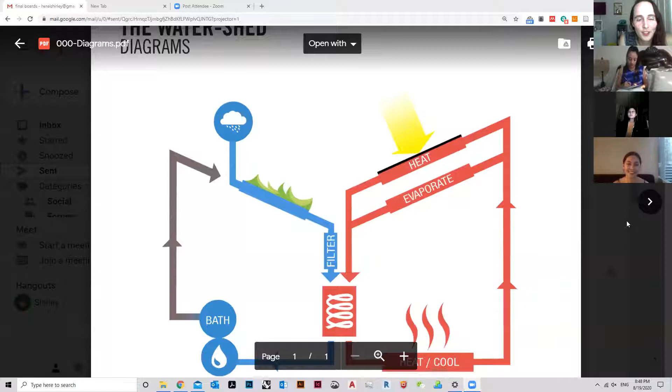That was great. So we're going to show you, Shirley, can you share your screen? We're going to show you what this sustainable architecture looks like in a research studio that we did during our masters.

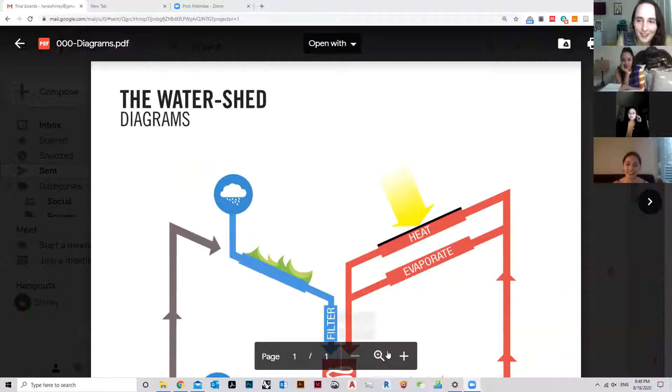I think our studio was a little special because we were also looking at water, and that's a very important component of sustainability that people usually ignore. Like I said, most people in the sustainable architecture industry think about carbon, but actually water is getting so scarce and we need to think about that. So you guys can start and tell me where to look.

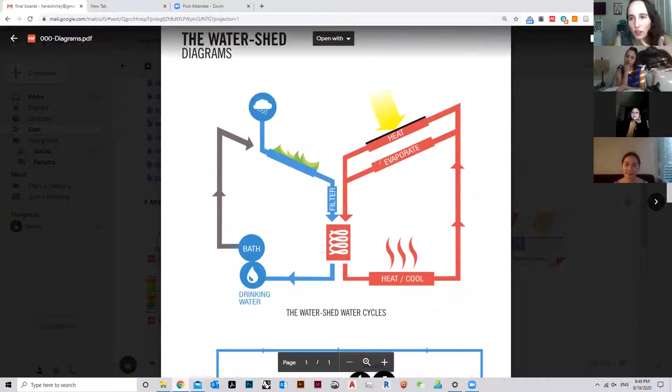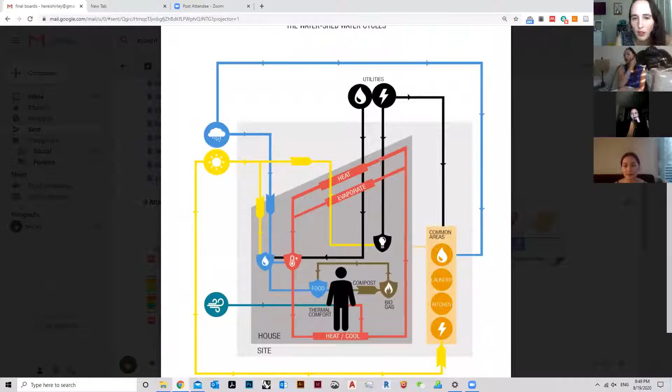Briefly, our project was to analyze a mobile home in two different climates and extreme weather. One was Buffalo, New York, and the other was Houston, because hot and humid and cold and humid are among the most difficult climates to design for. We had to select either one and do some analysis.

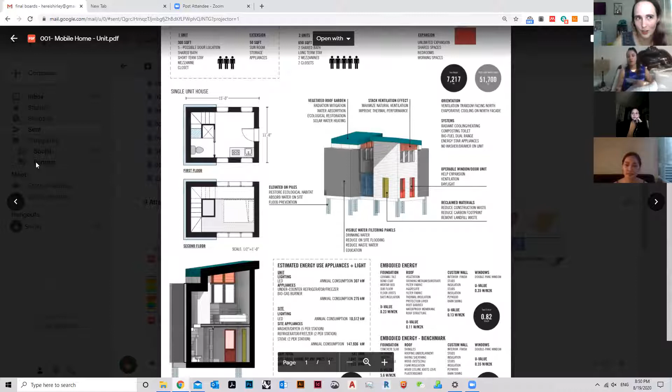We decided to do a house we called the watershed, because we wanted to think about real watersheds and what they do when they absorb water, filter the water, as a natural system. We wanted our house to display that portion of education - watersheds are a thing that are in danger right now in a lot of different places. Since it's Houston, it's also near the coast, so we had to do a diagram of the systems we were incorporating into this little house.

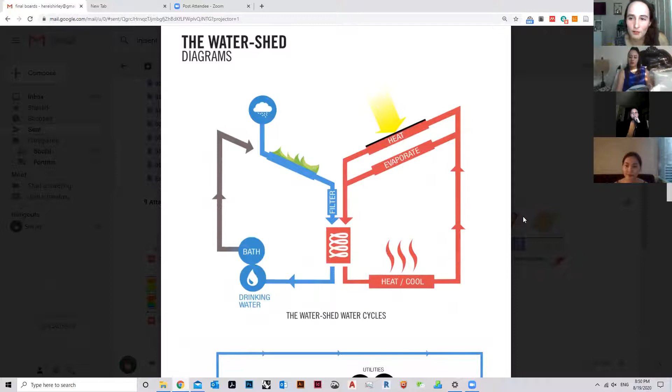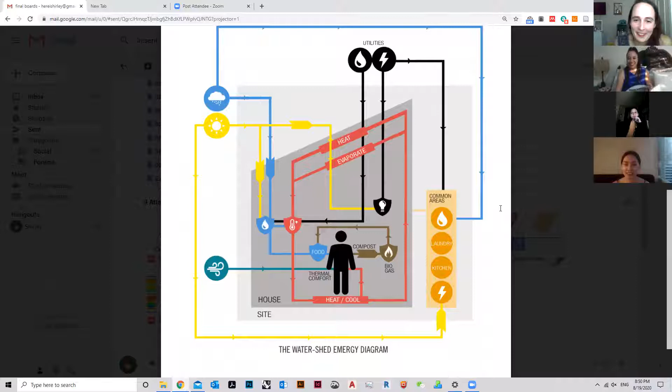So Mika, this is an emergy diagram - I don't know how to describe emergy diagrams, but I'll add that the reason we wanted to look at water is because there's a lot of drought happening now, and we feel water is such an important resource. If we could take architecture as a means to preserve that resource, or make it more available for people, that would be amazing.

This is just a basic emergy diagram that we created for the entire house. By emergy diagram, we mean it takes into consideration all the systems that would be placed into the house and all the resources you would need. The reason we create these diagrams is, as much as possible, we want it to be a cyclical diagram where you don't have as much wastage or as many resources getting wasted.

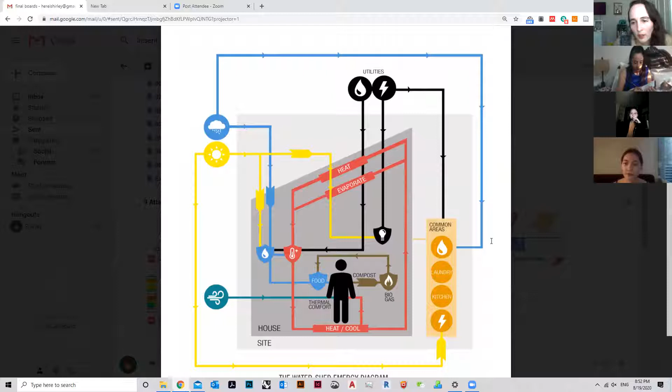Yeah, because right now we're relying so much on grid provided by municipalities. So if one day those things are not stable anymore, you would like to have some individual control over the necessary resources in your life, for example, electricity and water.

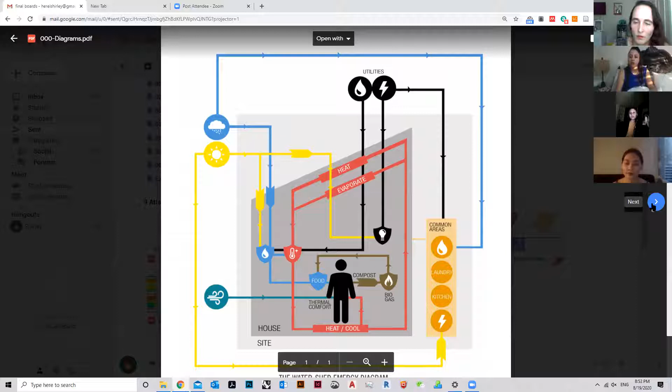So we had to look at transportation and the unit configuration, because one unit accommodates about 1 to 3 people. It's a tiny house. So we needed to provide for bigger families, because not all families can be accommodated with just one unit. So you want to make sure that this can grow depending on your family size.

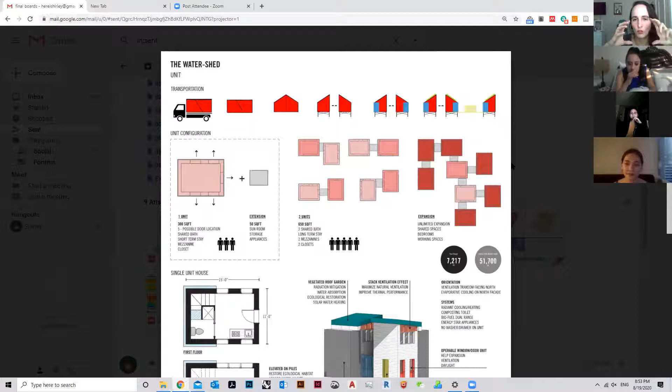So we designed this module and this component to the module where you can connect other houses if you needed more rooms. So what you see here is the one unit, 3-person connection, and then how it can grow depending on your family size.

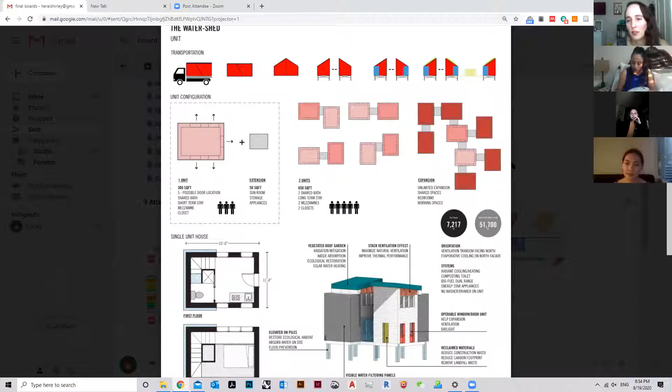On this, we had to do the... so this is just a diagram showing all the systems, like our wish list, what we wanted to put in there. It was all the environmental techniques that we wanted to incorporate. So some of them are like a vegetated roof, stack ventilation effects, looking at orientations in the systems, operable windows, reclaimed materials, and elevated on piles.

At a very early stage, we analyzed what the energy consumption of the house would be like with its appliances and its embodied energy, which comes from the materials. But this was just preliminary; we later tested it and did the full analysis. So you can go to the next slide.

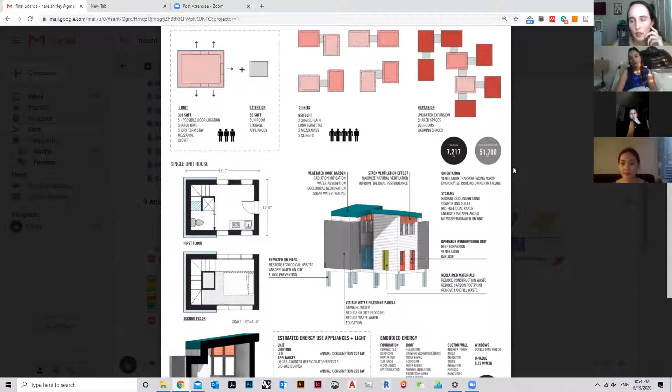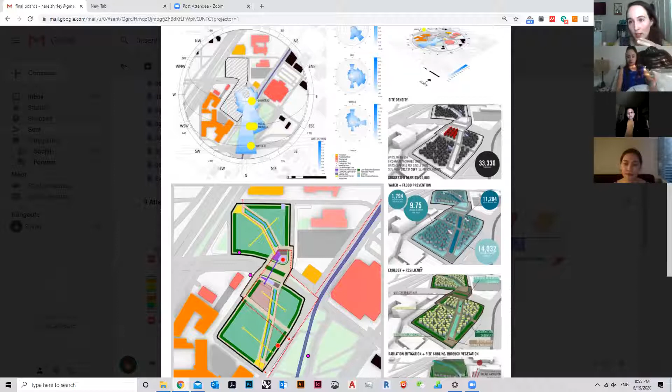So this is the site. We had to pick a site near the downtown area. We did studies of the wind and the sun angle, and the site density—how many houses fit into the site—because the more density you can have in a place, the more efficient it is in the end. You're using less land per module, which is a better scenario than just having a small building on a big lot. You're eating less of the land.

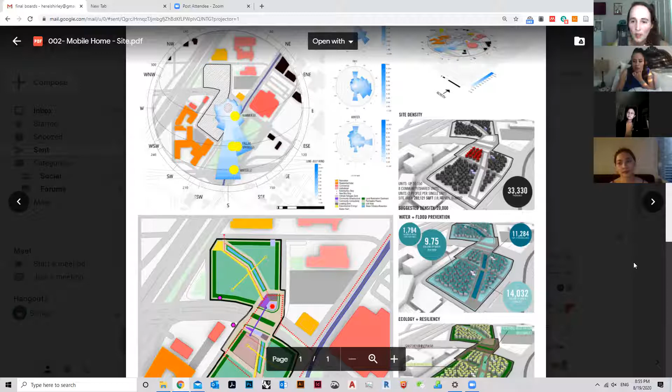We did water and flood prevention techniques. We did ecology and resiliency, because this is an empty lot—there's nothing in there. So we were strategizing how we were going to get vegetation and species in it and become more like an ecosystem, not just a house with its own systems, but at a site level, at a bigger scale—how are these houses working together?

Then we created a diagram showing how we were going to deal with radiation and have a site cooling effect, so that the site cools down before we have to cool down the houses. So it was thinking about this whole concept of the house and its systems at a bigger scale, and the use of vegetation to cool the site and provide enough shade for the houses to be below the tree canopy, because it creates a cooling effect. So if you cool down the site, the less energy you need to cool down the house.

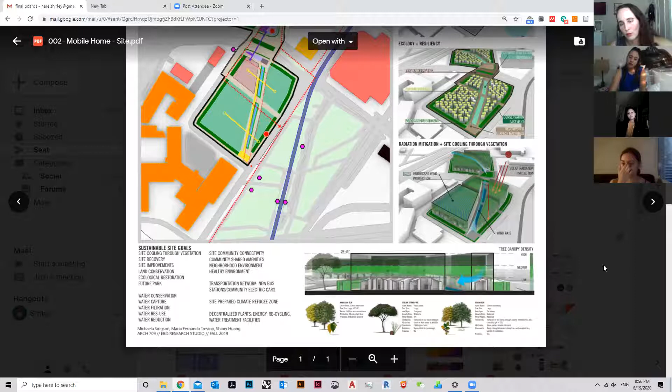So you can go to the next. It's a lot of information. Yeah, we did so much stuff.

So look at the watershed sections, and you can see different components we mentioned previously about filtering water from a vegetated roof, and also different layers of sand, stone, sand, charcoal, and UV to get rid of bacteria and bring it down to a level that humans can use.

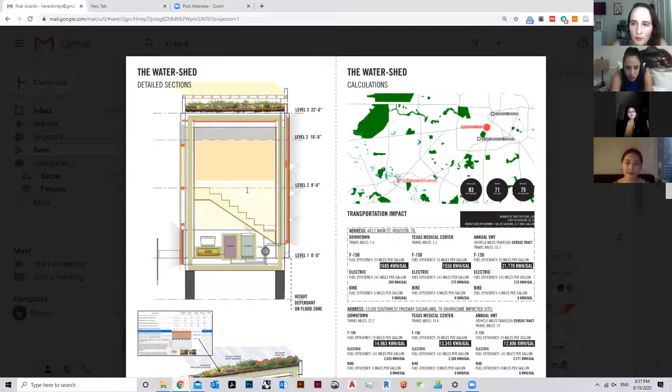In the house, we prepare tanks for people to store the water, and also a panel for evaporative cooling to control the temperature of the water. I think we also have a composting toilet that can, to some degree, regulate the interior temperature in the winter. We did some study on the local plants and on the assembly of the roof itself, looking at the thermal property and moisture property of them.

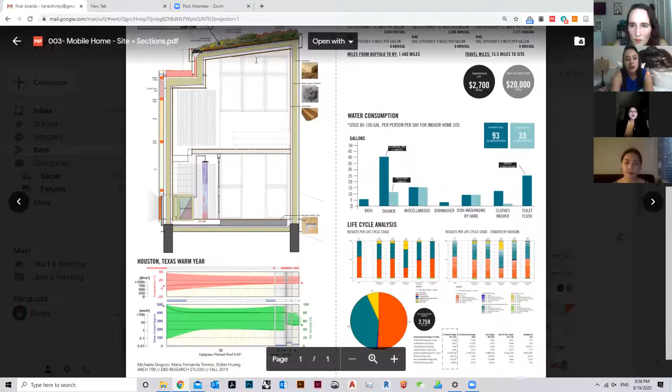Basically looking at the different components of the building and making sure that they work together. So we take a closer look at the transportation and water consumption. Maria, do you want to talk about those?

Yeah, so what we did on the transportation impact diagram and analysis is look at transporting the unit from one place to another in case of a hurricane, how much efficiency and energy will it take up. So that's pretty much those two analyses.

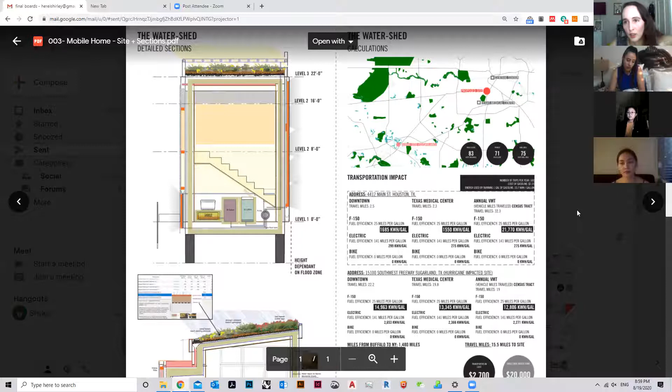And then on the water consumption, we calculated the average water consumption in a regular house, which is 93 gallons per day per person. We brought that down to 33 because we removed the water toilet, used energy efficient faucets, and some other measures. And we incorporated the user, so if it's a more conscious user, then the water goes down even more.

And then we did a life cycle analysis, which measures the carbon emissions from the materials.

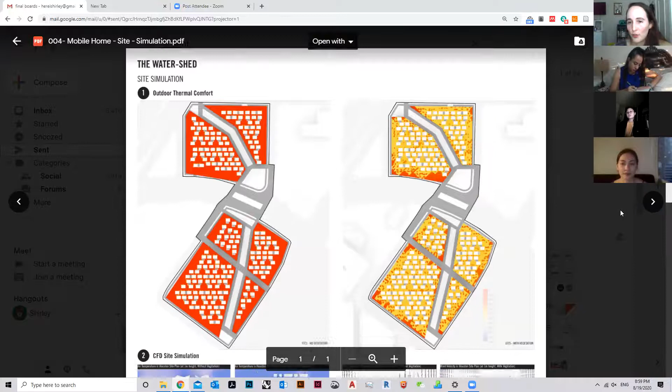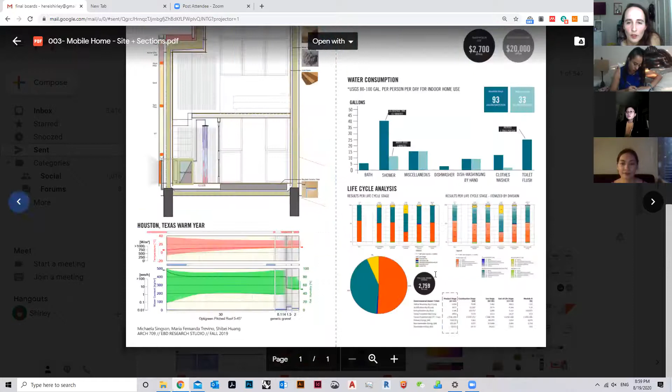After all that analysis, it's a diagram showing different scenarios - if you use this material, your carbon emissions for your house are going to be this high. Because we used a lot of reclaimed materials, and instead of concrete we used wood, the carbon emissions for the house are way lower. So it's that kind of decision making that makes your building much more energy efficient.

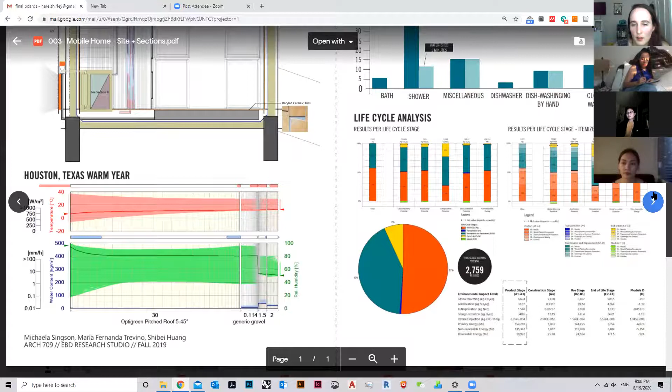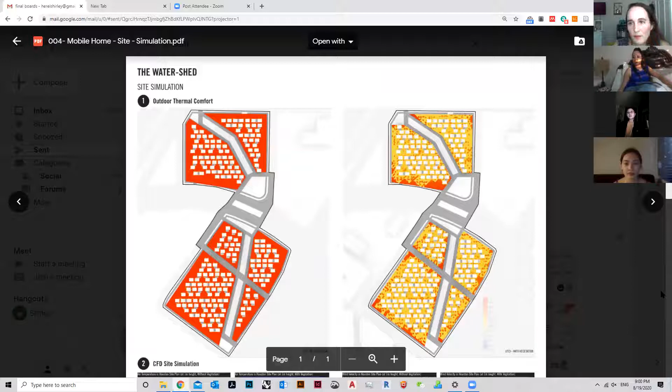You can go to the next slide. So the first one shows the difference between a plan without vegetation and a plan with vegetation. You can see the ground temperature got so much cooler just with the trees on site. So I think you need a lot of trees.

Yep, and a lot of leaves. Trees with no leaves - we got that critique at finals. I don't really get why leaves are bad, but people apparently don't like leaves decomposing on sites.

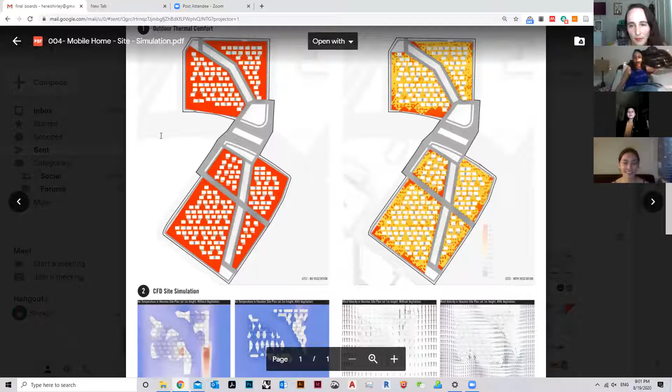That also explains why a lot of cities without trees have a heat island effect, where the cities get so much hotter than the suburbs with all the concrete and streets without natural vegetation. That's also another aspect of sustainability.

We look at CFDs, computational fluid dynamics, to understand winds. This is basically what we're trying to understand - how wind will travel on our site, so we can orientate our buildings towards it and maximize natural ventilation.

Oh, a lot of rainbow chart. Mika, do you want to talk about this?

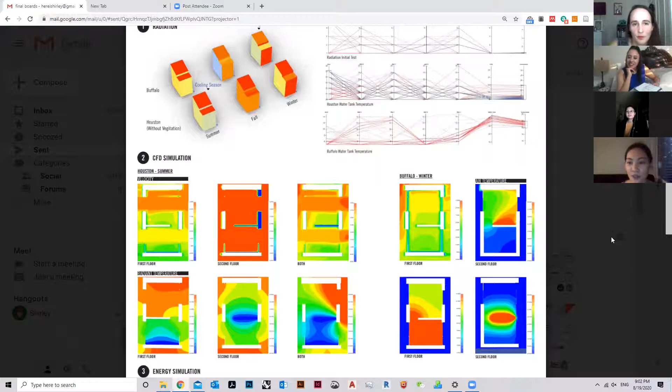Yeah, so what we also looked at were CFDs within the building, within the house, because we wanted to see how the wind would be moving throughout the house. We tried to create a stack effect so that the hotter air would move with the wind to the top of the house.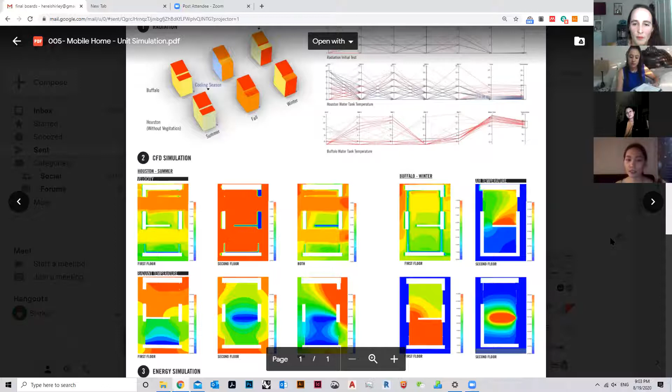So these are CFD analyses we did to try to see if what we wanted to happen was really happening within the house. We also tried to heat the lowest floor of the house to create that wind movement upwards, because hot wind technically rises. So what we tried to do was induce that movement from the bottom to the top.

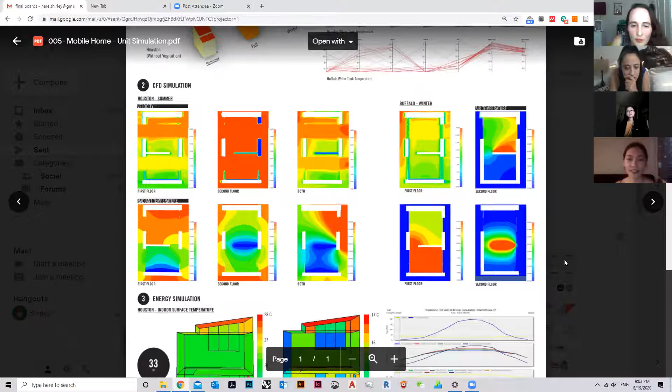And I think we were able to do that - we tried testing out where the heating element should be, whether at the bottom or in the middle. I think it confirmed our hypothesis that it should be at the bottom to create the most wind or stack effect.

And then we did the energy simulation, so how much energy consumption our house has, on Houston and Buffalo, in summer and winter, which is the most drastic temperature change on the cities that we were analyzing.

So we got not such a good number here, right, Mika? I think it was, oh well, not that good for a really, really small house. Yeah. We never understood why, but what's a good number? Is it supposed to be the lowest number that you get? You see that 33? A net zero building is supposed to be 0, which doesn't exist. It's like zero waste doesn't exist. Net zero doesn't exist.

Technically, I think you get net zero if you have renewables, so you're creating energy to offset the energy that you're using. Then it becomes a net zero building, which we tried to look at. Remember, we were thinking about putting solar panels on top as well. So yeah, we tried to do a lot of things.

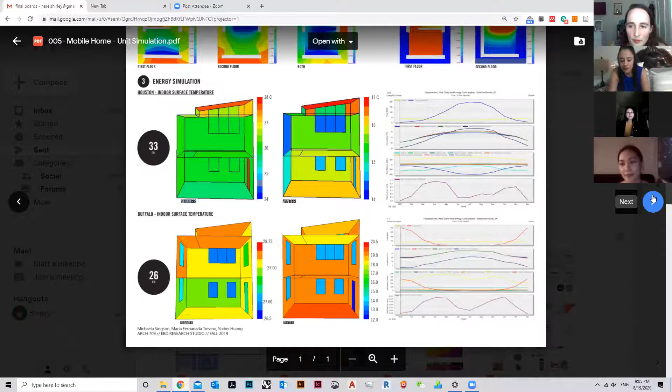Yeah, I remember the discussion of solar panels, but I think the key point here is that we tried to achieve a lower energy consumption by the building design itself. One of the reasons the EUI might be higher is because we packed a lot of things into a smaller footprint, and EUI is a calculation based on square footage. So if we had a bigger house with the same functions and appliances, because humans produce heat too, it would achieve a smaller EUI. The square footage is bigger, so you have a bigger thing to divide it by. So I think that might be a factor.

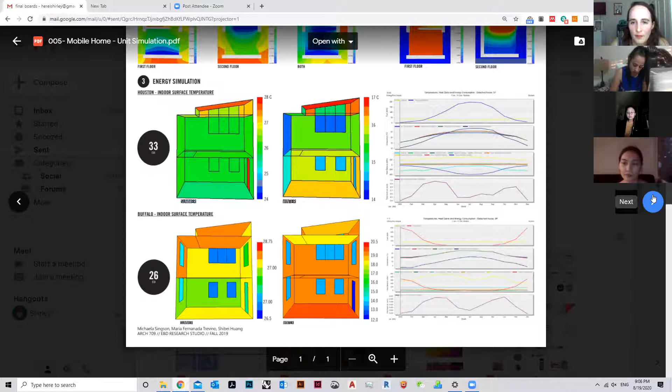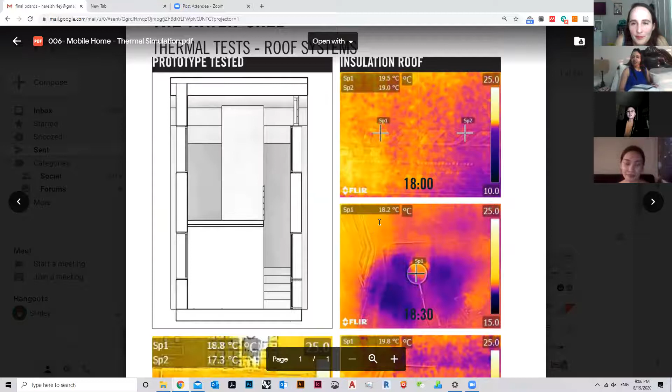So next thing, we actually built a tiny model, a prototype to test it. It was like we could fit inside. It's about our height, but still smaller than the house itself. We insulated it properly and used a thermal camera to understand heat going inside, and we also had a couple of sensors inside this model to understand the behavior. You can see the sensors in a different color in this photo.

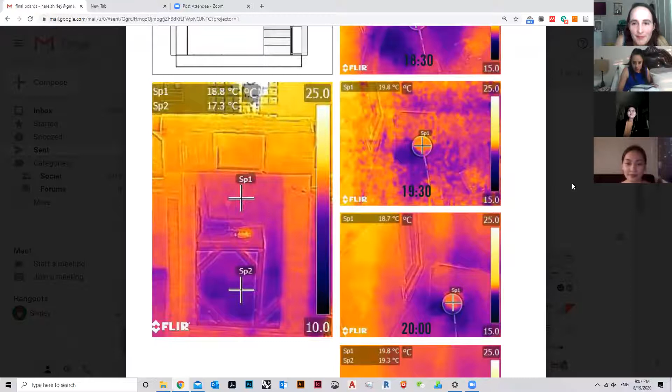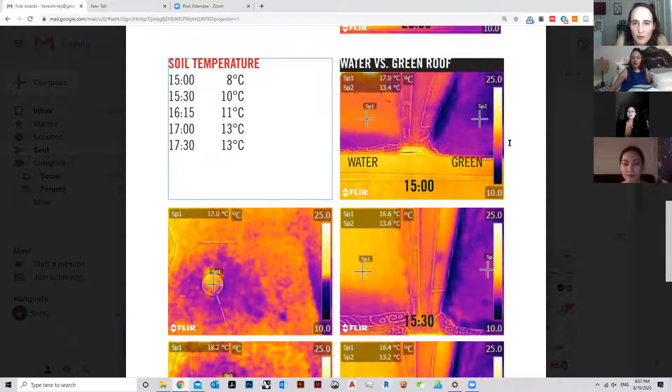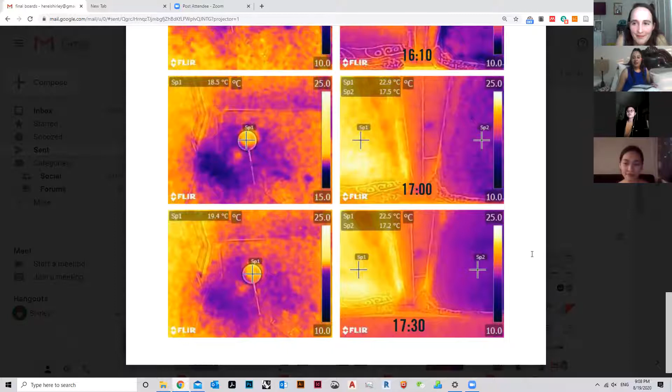It was freezing cold when we tested this model outside. This is comparing a water roof versus a green vegetated roof on top of the building. You can see how the soil in the vegetated roof keeps the roof a lot cooler when it's hot outside. We blasted a heat lamp at the model to simulate summertime, and it's really fulfilling to see the result clearly in the physical world, so we can trust our result instead of putting our faith into computer simulation and trusting that the math behind it is correct.

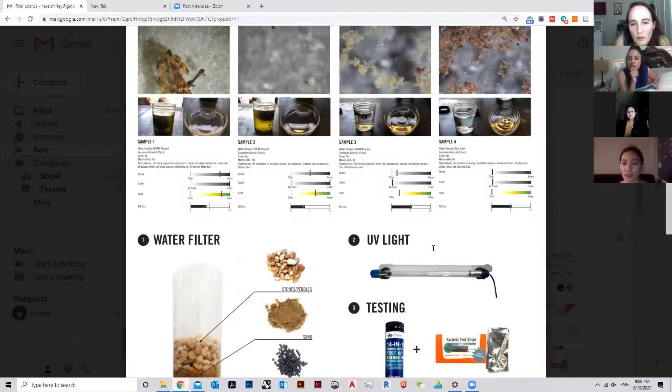We also did some water testing. Since we wanted a house that could sustain itself, we wanted the house to be able to filter water. So we also looked at possibly filtering the water on one of the walls of the house. This analysis was very eye-opening for me because we take rain for granted, but rainwater is way better than our drinking water.

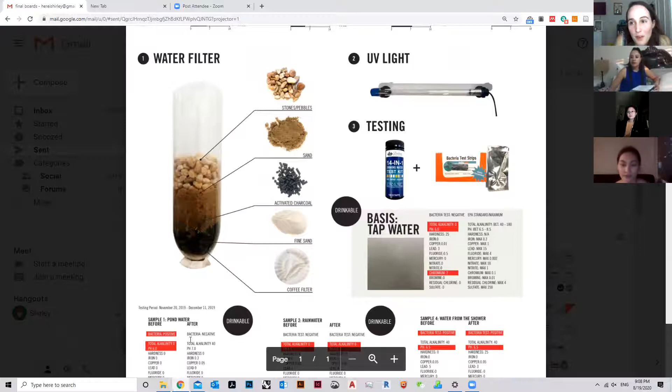We tested a lot of different things, and we found lead in the water where we collected the samples. Let me be clear that it was under the EPA standards, but it's still lead in your water, compared to rain, which is the purest form. We got some bacteria in the rain one, right? I think so, but we were able to remove that with our system.

So the question now is, why are we not using rainwater? I understand here in El Paso it doesn't rain much, so it's not a very efficient system. But in the Houston area, it rains quite a lot. So why not start collecting this water, store it, and use it? Why do we just let it run? And the weirdest thing is that sometimes rain overwhelms cities' sewage systems because people combine them. In Philadelphia, we found a percentage of lead in the tap water. Why not use the rainwater when it rains so much?

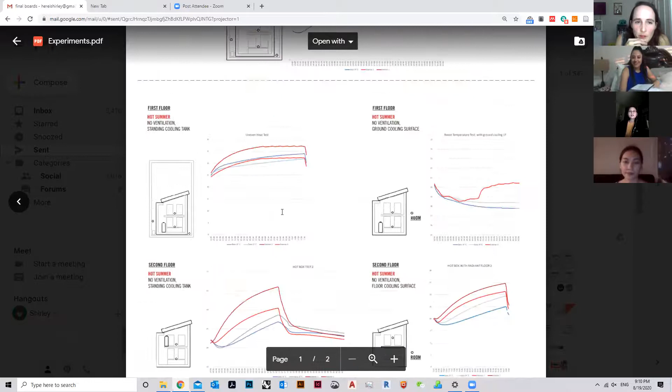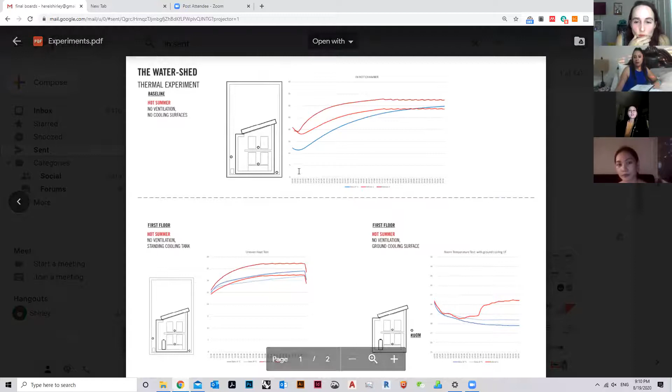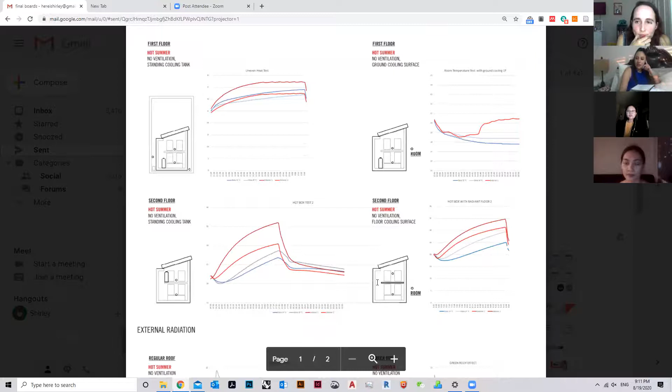So, interesting results here. Okay, I guess this is a little out of order, but these are the charts of temperature we found inside our physical models. Evan, who spoke last week, helped us build that heat chamber. It's a big, pretty tall square, and we can fit our entire model inside it and plant several sensors inside. I feel like these charts are pretty boring, and next time I'll find a better way to visualize the data, but basically it's finding out the effectiveness of our cooling and heating measured inside. I don't really remember them all, but it's okay.

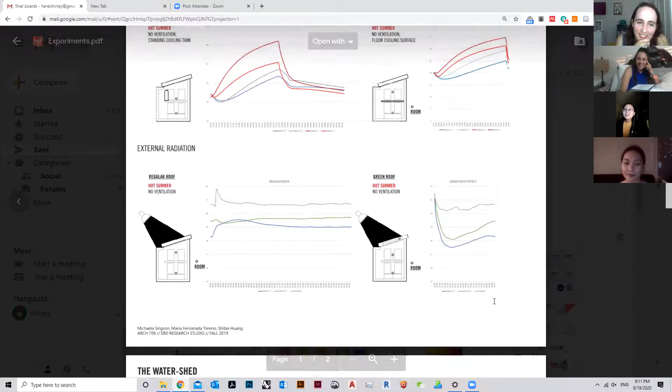But a very obvious thing here is the regular roof versus the green roof. You can see how the temperatures stay so much cooler inside for a green roof versus a regular roof.

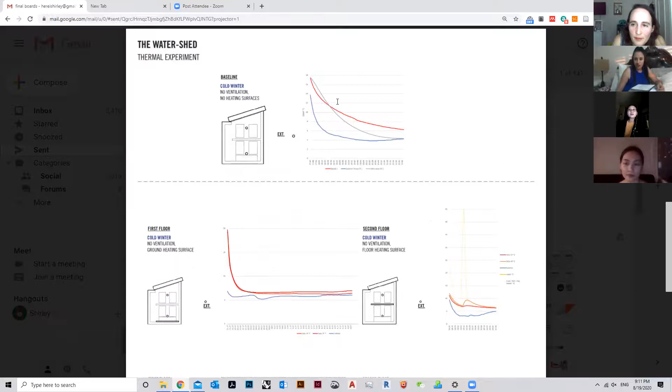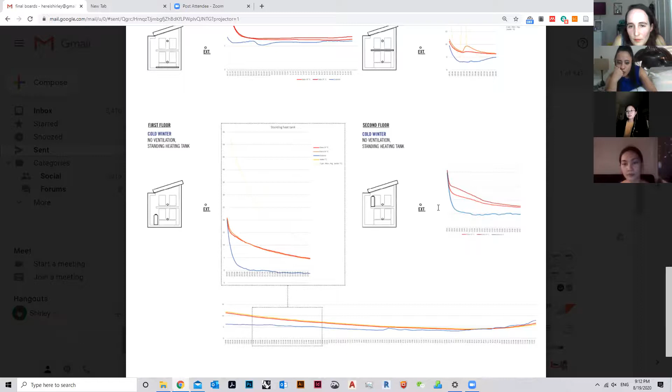And it just keeps going in a cold winter, which we have the perfect testing environment for on the exterior of Philadelphia. And our radiant heating device actually works okay. You can see the two red lines go above the temperature outside pretty regularly after a long period of time, because our insulation is effective, so it's able to keep the heat interior.

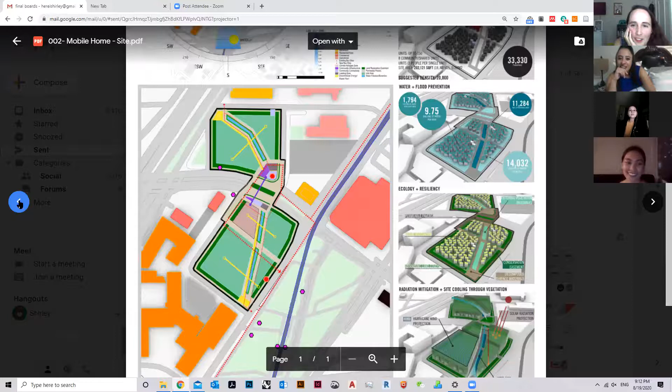Okay, yeah, I think that's everything. Oh, we need to show the house. Do you have the renderings? Oh, yeah, I probably don't have the rendering, because you haven't seen the final product. Yeah, unfortunately, I don't have that. I think it's there, probably the closest thing. Let me see. I might be able to share it. Give me one second. Yeah.

Before Mika joined, I actually told Maria that I feel like the three of us are a very balanced team. I feel like I went on the engineering side of architecture, pursuing the technical things, like what I did in the studio, because that was sort of my role, saying no, it doesn't work. But I just want to know what you think, Mika. Do you think your career path right now has something to relate to our studio?

For sure. All the things that we've learned in studio, I'm using today. A lot of what I'm doing now is analyzing the climate and then coming up with possible strategies that we could use in the building so that it's more comfortable inside, so that less energy is used, so that we minimize carbon. It's actually like our whole studio project, but it happens so quickly because now it's needed right away, so that before people really concretize the design, we're able to make a difference with what is being designed.

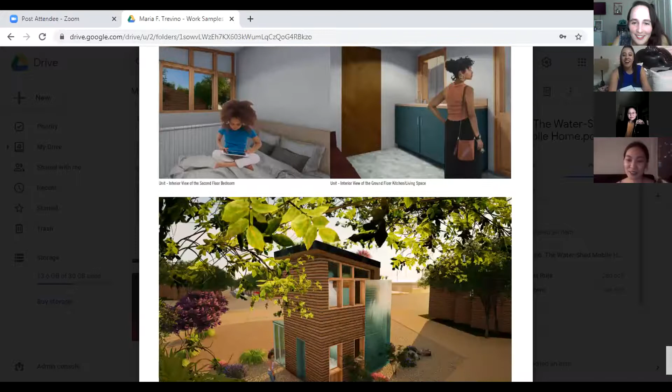It was a lot. I know who is going to design our installations, like the COEX installation. It's going to be all three of you. I already told Mika, and I just told Shibis. Yeah, you guys have to help us out because we want to be as sustainable as possible, no matter the cost and no matter the time it's going to take. So I'm mind blown right now. Yeah, let's talk about that later. You just need to get the money, and that's it. Yes. Just wait for us a bit, and we'll accomplish it.

And if you take the same approach we did, like use some reclaimed material, go visit some dump site and see what's available on the reclaim market already, those can save you a lot of money as well as energy.

So just, Bombitas, because I know you're visual like us, these are the renderings of how the house looks. It's actually missing piles, because these are not placed on the floor. It's elevated. We didn't have time to change that, and nobody really paid attention to it. But these windows right here are part of a system that drains warm air out. Everything in this house has a reason to it.

These doors right here are actually kind of like windows that you click in and click out in case you have to attach another house next to it. You don't have to demolish the house. You just click in and click out the window unit and then connect it. This right here is supposed to represent your water tank, and we wanted it to be visual because we wanted people to see how much water there is.